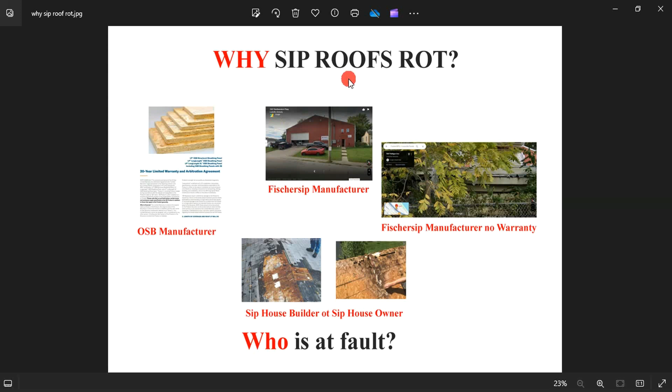Why? Let's look at OSB manufacturer LP. They specialize in producing OSB panels that most manufacturers of SIP panels use to make their product. This is just a component. In addition, they use EPS foam, basically a foam that you can use for transportation, packaging, whatever. But look at this - a 20-year limited warranty is what is provided for this material.

What happens once this material gets to a manufacturer like Fischer SIPs? That warranty disappears. What are they doing in this garage to that OSB where the warranty disappears? Or they do not, as you know, provide warranty on their SIP panels, with exception to lifetime delamination. So why does this material with the warranty get inside of this garage and lose its warranty?

Well, let's go over here. And by the way, this is courtesy of Fischer SIPs images, okay? And so is that. Now look at this - I've talked about this in my other videos, where the storage, how manufacturers keep their product. Well let's give you an even better close-up look. See, this is basically stored outside, with the foam blocking ventilation for that panel, sitting outside the way it is.

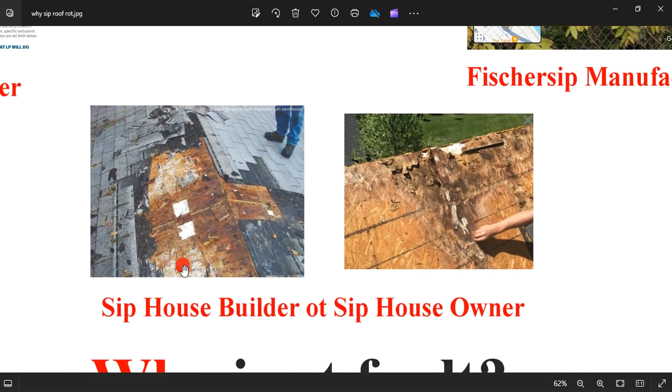Okay, now what do we have here? Well, yeah, 6 to 10 years later, happy owners discover just that. And when they do, they cannot sue anybody, they cannot claim warranty. They just sit there asking questions on the internet to other people, like what should I do? Where should I go?

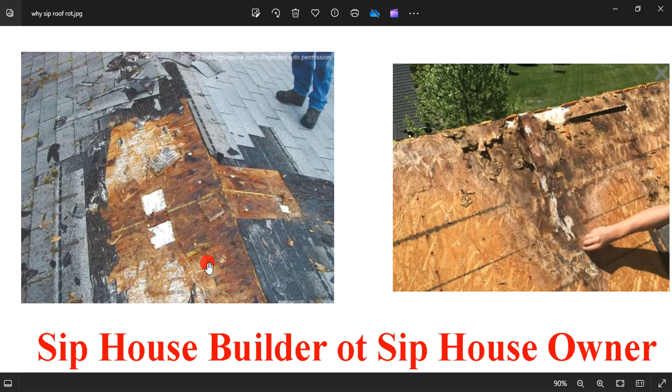How to repair? Because SIPA, they give you training on how to put it together, but I didn't see - maybe I'm wrong - but I didn't see any training there that would tell you how to repair that kind of damage, because that's a stain on this product nationwide. So that's why you're not gonna find these images on their site, and I can guarantee you that because I've looked.

Okay, so we're gonna go first to Rare Manufacturing Inc. Now I'm using this website as my reference, and I think they're credible. They build their houses traditionally, which is stick and frame. And the reason I choose them as my reference is because they provide a very good detail on how a roof should be ventilated. And again, we're looking at the traditional way, right?

So they have this very good detail right here, and I'm gonna zoom that up.

And on this detail, they indicate how the air flows under the roof and escapes, right? Yes. So look, they have insulation, and that is not foam. This insulation allows, typical traditional rated, allows air to get through. So yes, this is how that should be done, traditional ways. And let me tell you, if you use SIP panels, it doesn't mean you shouldn't be ventilating that roof. Every wood piece exposed to moisture, main structure, it should be ventilated. So we're not going to compare traditional roof to SIP, but both have to have ventilation.

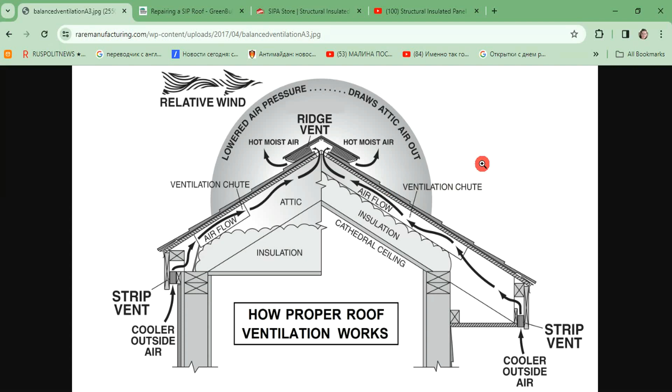Going to this Green Building Advisor, repairing the SIP roof, as you can see, guest blogs. So that is people running this blog asking questions and advising each other. And where is SIPA and manufacturers of SIPs at this point? I don't know. But look, December 12, 2016, when it was posted, and the poor guy asking for help, how to repair his roof. They had leaks and possibly rot, and so he got a crew to help him out with that.

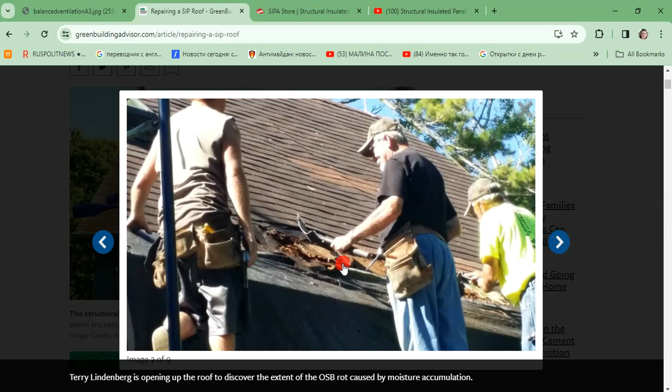And as you can see, this is all intact. Just around here something happening. And look, next image will show their first discovery right here. Rot. Yeah. Rot. And because it is a panel, it's a process, it's gonna destroy the entire panel. It's not gonna be isolated on just one roof beam or joist. No, it's gonna rot entirely. Look, so the damage is devastating.

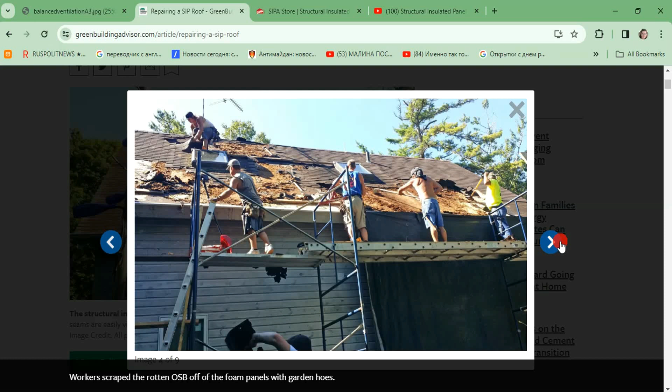Here's another one. And look at this. Look how many people fixing it. We have 5. Oh, there's one over here too, 6. Probably more that it is not in the picture. But when SIPA says build with SIPs and you're gonna save on labor, yeah, we did save on labor, because we got one builder. He came along with his crane to put these panels together.

Now let me ask you, this guy whose roof is actively rotting right on this image, did he save on labor to repair it? Look how many people working now. Is it really a great way to save your money, when you have to find a whole crew to replace it or repair it, or maybe, I don't know how they did this. I have no clue. But certainly not labor cost economy. No, not 6 or 5 or 10 years later after it's been put together.

So let me see where we're gonna go next. I'm gonna go to SIPA. Yeah, SIPA. This is their store. Go to resources, store, and you're gonna end up right here. This is the resources for everybody, I assume, not just builders, right? Not just them. And they have a lot of printouts here, free. And I downloaded every single one of them. I have them now on file if they start scraping that off at some point in time.

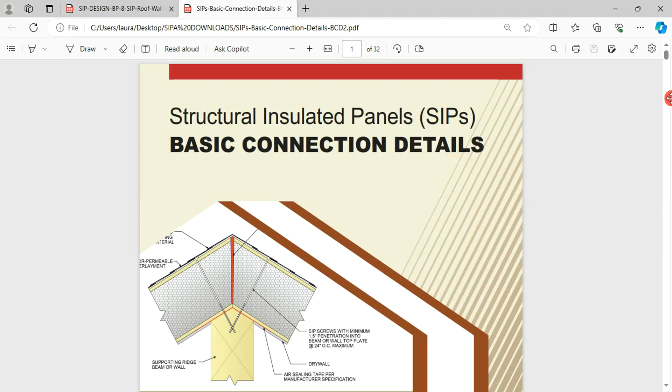And we're gonna look at some of these printouts. And again, today I'm gonna be focusing on the roof. We're gonna go to this handout by SIPA. Basic connection details. How to do your roof. SIP roof, by the way. We're gonna go to details 18, 18A, and 19 as we're going along. Okay, there we go. So look at this. Look at this detail, and I'm just gonna show you, then I comment a little. This is SIP roof.

Panel, vapor, shingles. This detail is officially posted on SIPA to train their builders, right? This is how they train. This is what builders have to go by, right there. So my question is, how is it ventilated? Do you have this question too? I mean, it's important, it has to be, but how do they show ventilation on this detail?

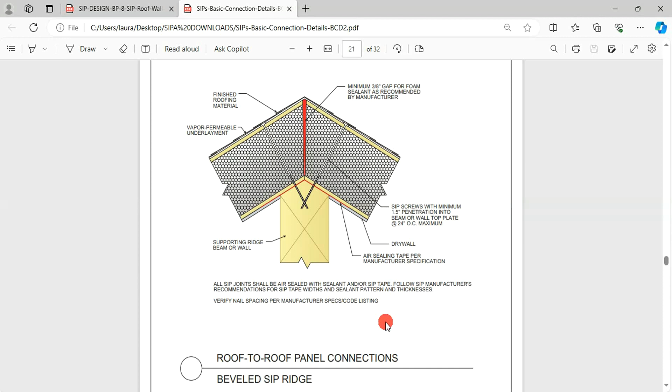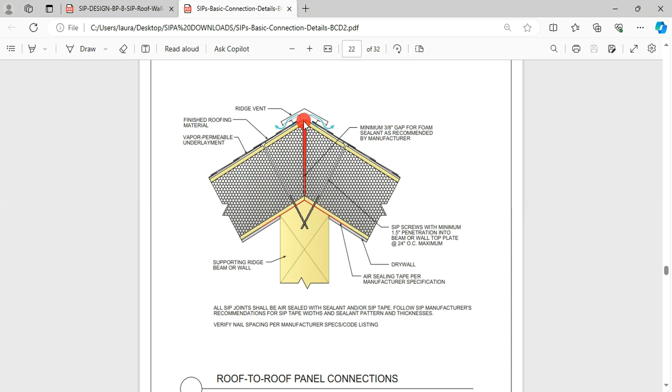So they're ventilating just this opening right here. What about this side of the panel here? How does the air get in there? Because they claim, oh, EPS is very tight, closed cell material. It does not let in and out. That's why you have an efficient house. But how is this ventilated? It makes you think, right?

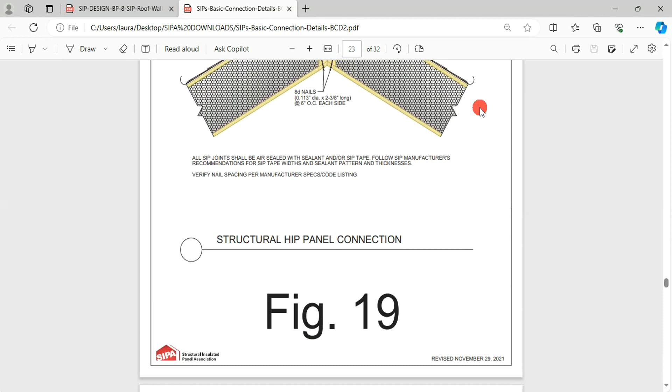Here's another image. Look at that. So issues as ventilation, that if lack of will cause a rot, they don't even show this as of January 26, 2024. They don't show it right here. It's on their guidance. This is how they train builders to install their roof, so that people like myself find themselves in disaster 5 to 10 years later, dependent on the quality of SIP. And yes, the most important thing is here to look for, right there.

Revised November 29, 2021. So, question again: why was it revised in 2021, how many times did they revise it before, and what was the reason for that revision?

Is it because a lot of people post their rotten roofs? I don't know. And what about those people that built their houses before 2021?

I'm just thinking, what did they teach builders in 2013? That's when our house was installed, right? I'll show you, hopefully I'll remember to bring that up. But for now...

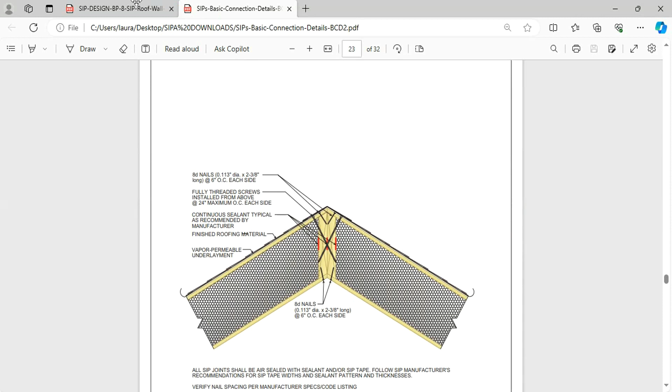November 29, 2021, and they still show you a detail with no ventilation. That's how SIPA specifies it. Now I want you to show this here.

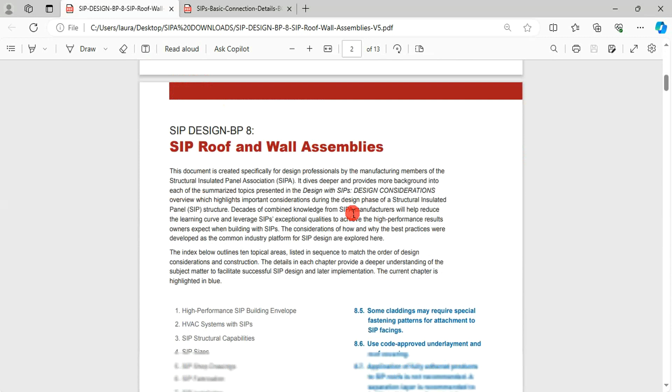There's another printout from SIPA, SIP roof and wall assemblies, and we're going to look at page 5. Courtesy of SIPA, this detail here does show the ventilation. Look, they added another panel here to ventilate the original structural roof, right? So they show ventilation air introduced.

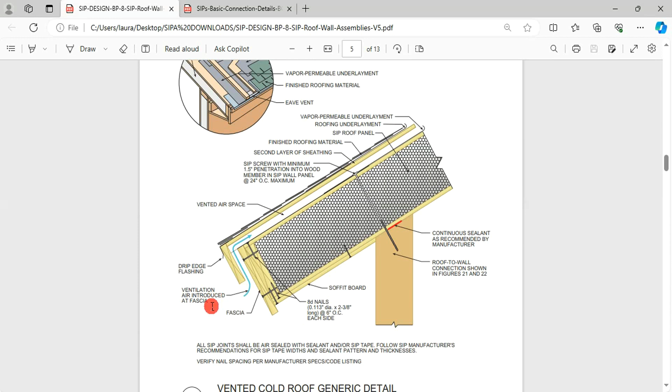My question is, when was it introduced? Yesterday? Maybe? I don't know, because look, there is no date. And they're probably going to go and claim, oh yeah, we had this detail since 1950 when we didn't have AutoCAD and Alden Dow created panels.

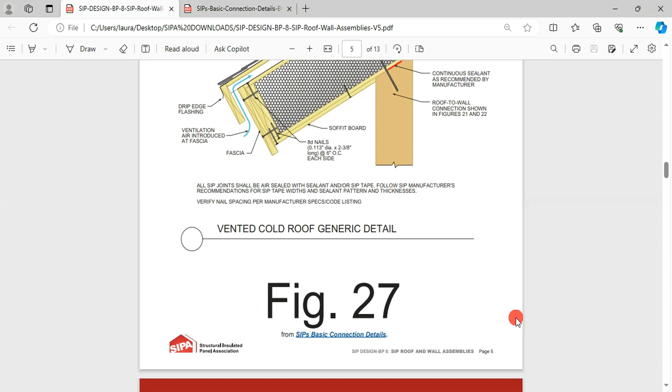Yeah, they love talking about the history of SIP panels, that it goes back to Frank Lloyd Wright, and we'll talk about that too one day, because it's very nice to attach the name of the greatest architect of his time to their product, because that creates trust. That creates trust when the product has a long history. I mean, do you agree with me?

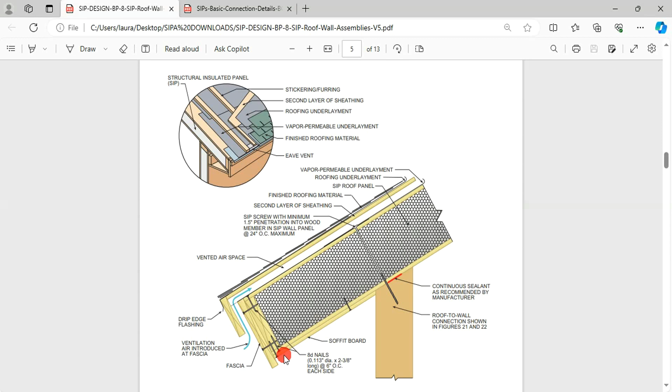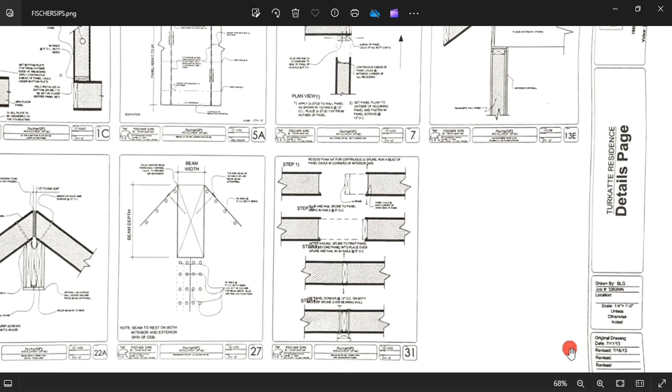So let me see where we're going next. I'm going to show you our own drawings, how Fischer SIPs specified to our builder and their installer, on 7/16/13, how he should put the roof together. It's just whatever, probably copy paste to begin with, they just use it over and over.

But this is what you need to look for right here. Look, Fischer SIPs manufacturer specified how to use their product for the builder in 2013. Take your time and look at this. What's wrong with that?

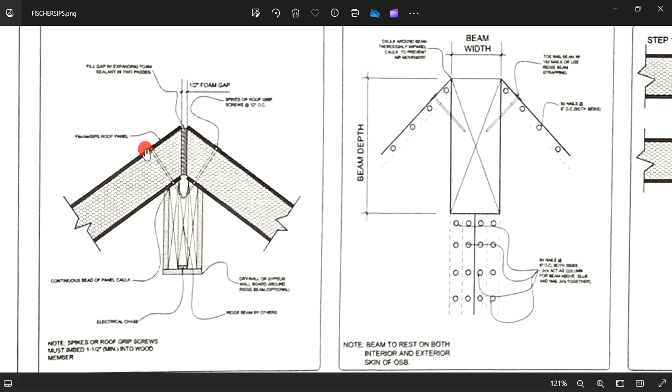Zero information on ventilation, zero information on finishing the product. So if you see this, you would think, oh, you don't even need to finish it back in 2013, right? Because that's how you should do it. Yeah, you don't even put vapor barrier, it doesn't matter, it's not afraid of water and moisture. It can stay on its own because there's nothing in reference to finish, not even talking about ventilation.

Yeah, just look at that. And now let's see where we're going next.

We're going to go to the SIPA Panel Association and their YouTube channel. Like they told me on the phone, they are a training organization. And this gentleman here, Mr. Cobb, I spoke with him a couple of days ago, told him about the problem and everything. And guess what he said?

One of the reasons, he listed many, but one of the reasons he said the problem with our house is our unqualified builder. And I'm assuming he said that because the statute of limitations to sue that builder is 5 years, so I cannot sue him. But then he also listed other problems for the roof, like moisture, leak, whatever. So not Fischer SIPs, obviously, not SIP panels, obviously.

But the reason I'm bringing you to this website is to show you, courtesy of YouTube, this is the official channel for SIPA. Let's see what kind of training they have for builders, especially for those who want to build now. They did post lessons, and they go back 2 years, literally just 2 years ago. So people building now have a little feedback to lean on.

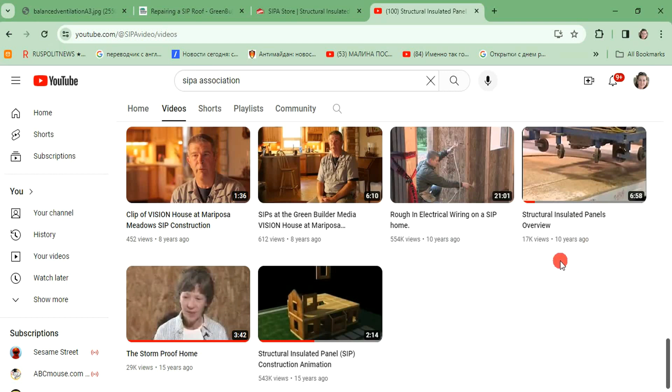That doesn't matter now, we're way over that time frame. But look at this, from 15 years ago, this video and this one.

I researched that lady and found her house. She's talking about how great that house was in a tornado, storm, whatever. That's another reason why my father chose this material, because it's very strong and durable, not going to be demolished like a birdhouse.

Well, this lady built her house using wall and roof panels. She did not use floor panels. If I were her, I would check her roof right now just to make sure it's okay.

We don't know either, because we haven't heard feedback from her today. But the reason I want to show you this video is this is what we had when our house was built by the builder, and that information was apparently available for the builder to see.

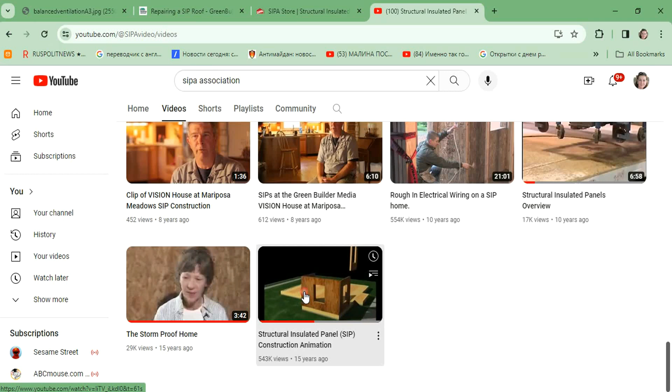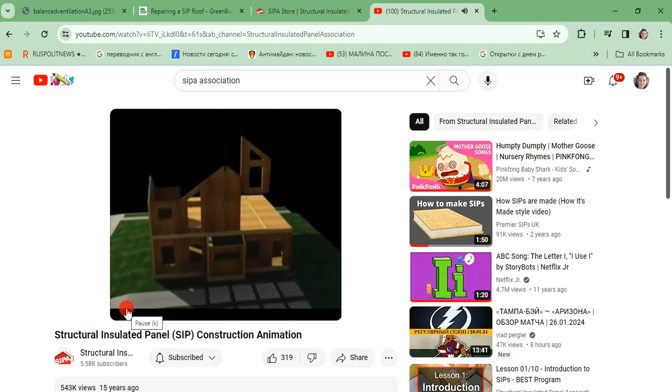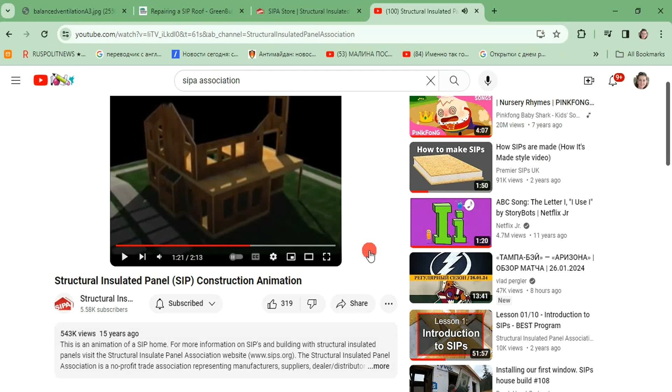Let's look at that. We're not going to watch the whole video, but do you see a lot of information here? Do you see details, specifications, how to build? What do you see? I only hear music, and it falls like Lego blocks.

Yeah, like Lego blocks. But this is not a Lego blocks house, this is a structural insulated house. People live in it for real, and when it gets destroyed, they rot in their house. So the question is, how much information did builders and owners have at the time our house was built? Tell me if that information is sufficient for anybody to build a SIP house to code.

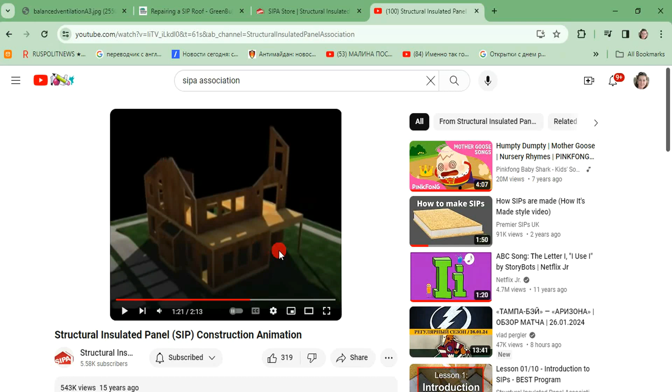One thing I know is that right now we've got a rotten house on our hands, and nobody wants to look into that. Nobody takes the time to alarm other people and flip that agenda over. This is not a product, at least by Fisher SIPs, to build your lifetime house investment, because you're going to lose everything.

All right, so I hope I did okay. This is my very first premiere video using a screen recorder. I hope it went okay. I probably made some mistakes as I was talking. Again, this is my third language.

I'm also distraught, disoriented, disorganized, because the situation itself puts a huge toll on me. I thought I could work with disabled children. I have one, and I've learned a lot, and I can take any disabled child and teach him anything, compared to the ABA therapists that currently come in. That's probably a different blog I need to open, to help mothers give their children the best. I'm certainly open to that as well.